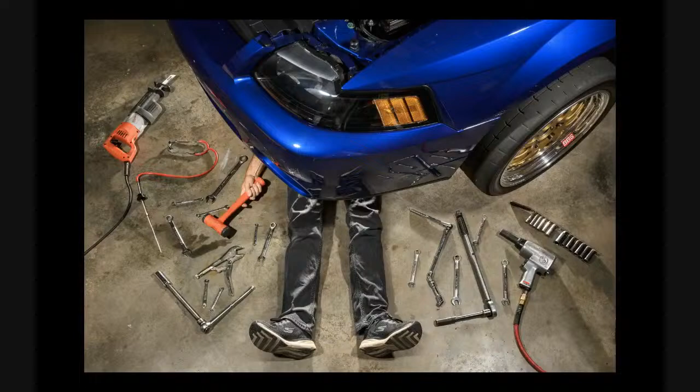So a little bit about me. I'm always wrenching on stuff. My Mustangs are in my garage in various states of undress all the time, so that's pretty typical.

Look, there's a theme here: cars in pieces and out in the open. Here, I guess I'm taking the K member and stuff, and I was going to put it in a different car. You could see my high-tech engine support device there, a 4x4 with some chains, which does work quite well. That one donated suspension to this one, which is a car I got for free -- probably that was too much as well. But this is an '83 Mustang Coupe that I got.

It was a V6 automatic car that somebody gave to me and said, 'Here, you need a Fox.' So I thought, okay, well, I need another one, and I wanted to build one. What I ended up doing is building it into that -- at the time I had a full-time job, and I wasn't real crazy about the full-time job, but I thought, I really want to build cars. At the time, I wanted to build cars for a living, race prep cars, build cars and stuff. So I thought, I really want to do this.

So this became what was going to be my rolling business card for that endeavor. Carbon fiber front fenders had made, exhaust through the body, all kinds of fun stuff. But I wanted to have a gutted, road legal track car, and that's what I built it into. I did everything myself except for the paint and the body.

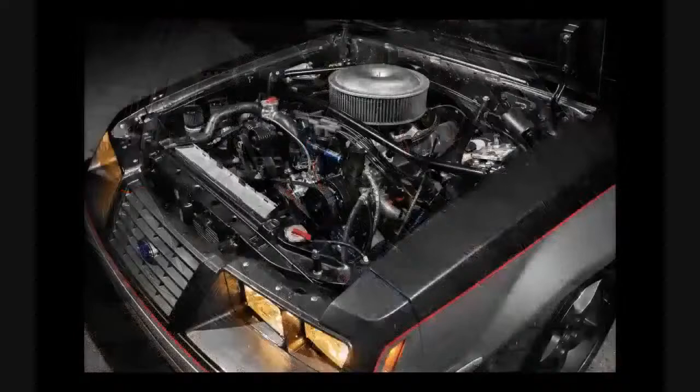At the time, by the time the car was finished, which took me several years to finish, I started to get into photography. And that kind of derailed that plan.

But here's another Fox that I've had recently, changing the heater core. There's another trend here, it's out in the driveway working on it.

When I was in college, I went more for an art degree. I wanted to be an industrial designer, just product design. But of course I had a passion for cars, I was constantly drawing cars and had ideas about them. So I quickly realized I was more interested in working on my car than actually sipping coffee and thinking about design.

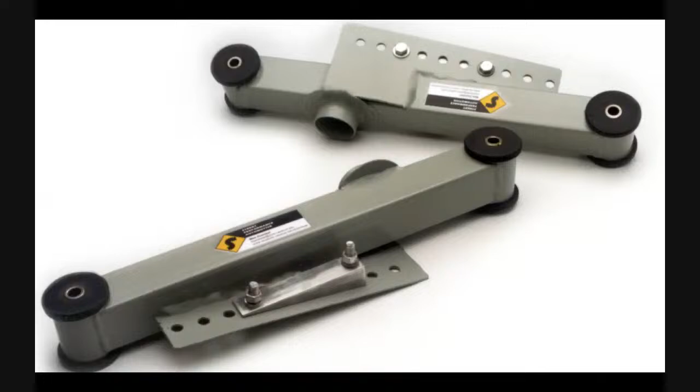This is something I designed as a senior project, some control arms that had an adjustable sway bar mount. A lot of it was just figuring it out, as far as where even to find materials. I think I even used tubing that was exhaust tubing for the bushing sleeves, which would not be advisable, but I didn't know at the time. I didn't know there was such a thing as metal supply places, I just took what I could find. But eventually I learned how to do it differently.

In 1999, I wanted to do an internship while I was going to school. Usually you try to do an internship during the summer, especially when you're closing in on graduation. So I went through a Muscle Mustangs magazine, flipped through the whole thing, and sent emails and letters to all the advertisers in the magazine, because that's where I wanted to do an internship. I didn't want to do an internship at the placement office at school, because those were boring places, making food processing stuff or injection molding and cheese making, since it's Wisconsin. I didn't want to do any of that. I wanted to work on cars. I wanted to learn how to do it.

HP Motorsport was one of the only places, like one of two, I think. I sent probably 30 or 40 emails and proposals to people, and they were one of the only ones that called me back and said, yeah, we'd like to have you come out. I thought, great, let's do it. I remember at the time it was $450 a week to pay me, and I thought that was a lot of money. Some internships aren't paid, so this sounded great.

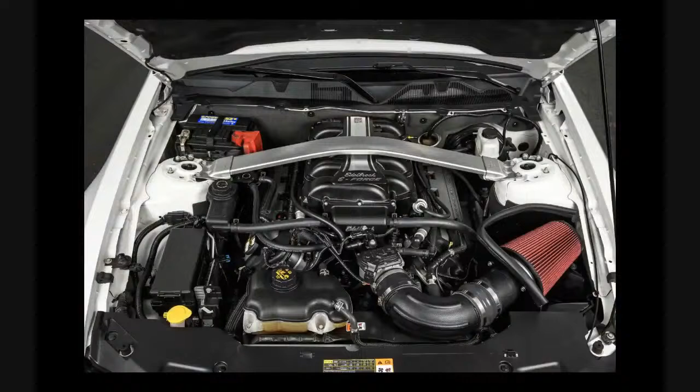They're easy to work on. All the hose connections are click hose connections - no hose clamps to monkey with. All the fasteners have little flags on the back, so if you're taking a nut or bolt off, you won't have to hold the other side with a wrench. It's really easy. They made it easy to assemble, and of course that makes it easy to disassemble.

This car ended up with an Edelbrock supercharger that we did for the book. Can't remember exactly how much power it made, but I think I have a dynograph here. We put a Tremec Magnum transmission in it, plus a bunch of other stuff. On the Mustang dyno, we started at 339 horsepower to the wheels and ended up with 537 at the wheels, with the stage 1, stage 2 Edelbrock kit. Really good power.

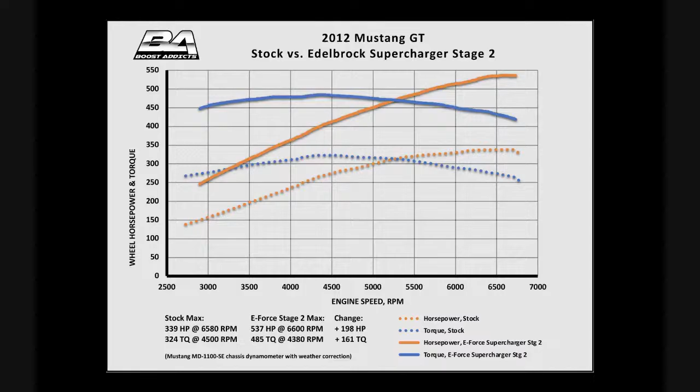These cars are responsive for modifications. It's not like the old push rod days where you'd pick up big gains by putting on an air filter or something. The gains are incremental, but significant. So over time, by adding a bunch of different things, you can make good power. Headers are helpful, and there's the Magnum transmission - really good.

Suspension stuff, Kenny Brown stuff. I put that in the rear grip kit, and I have to say, this is not a plug, this is serious. It fit perfectly. I was extremely impressed with how well it fit. Usually you're thinking holes don't line up. Working on Fox bodies and SN95s, stuff's not really going to line up anyway, and usually you kind of have to wiggle a bolt to get it in. But this stuff just bolted in like it was factory stuff. All the bolt holes lined up. It was super nice.

Another thing I learned that was really interesting is spherical rod ends. You think they're going to be a little noisy, not rattly, but transmit a little bit of noise into the cabin. I could not tell the difference between the rubber bushings and this from an NVH standpoint.

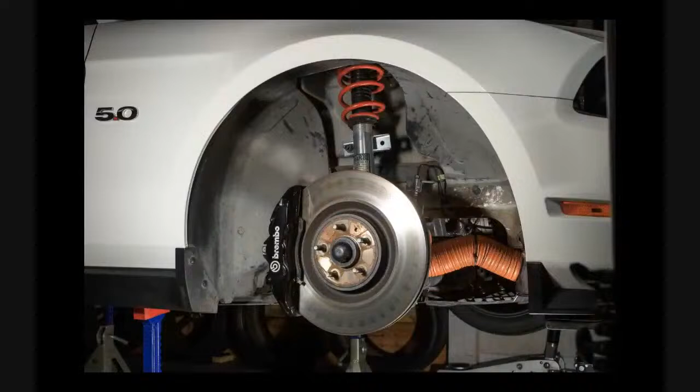So one thing to think about: it's easy to make a car fast, it's hard to make a car better. This suspension stuff, sure, it makes it faster, but it makes the car better, and you're not going to have NVH penalties or any of that stuff. It was phenomenal, I was really impressed with it.

Braking wise, I put GT500 brakes on it. These brakes are also really incredible. Had Kenny Brown brake ducts on there as well, and also the Street and Performance coilovers actually came from H&R, and that was a really nice setup as well. Spring rates seemed really good for road driving, and it made the car obviously a lot more responsive. You can adjust the ride height as well, which is nice, and it bolted in just like stock.

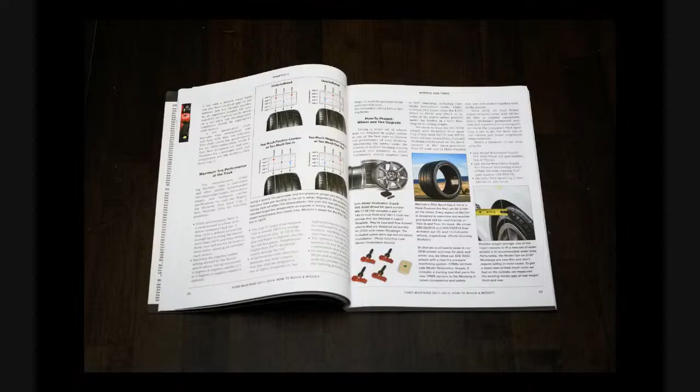In the book, we talk about a lot of things and I try to cover a lot of theory, not only what to do but why it works. Here we talk about basic stuff like tire temperatures and how alignment affects tire temperatures. Tires are obviously a huge performance factor, so having a good 200 treadwear tire is going to make the car feel and perform a whole lot different. We talk about suspension stuff too.

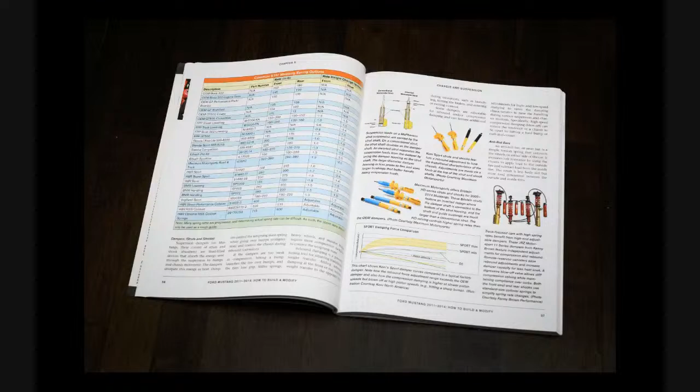So not only what, but why. I mean weight transfer, springs and shocks and all that stuff, and how the center of gravity relates to weight transfer, and how spring rates relate to weight transfer. I have some different spring options listed here, damper rates, and how dampers affect and even damper construction - monotubes versus twin tubes, what's the difference and why. Sway bars too, that's another big tuning tool.

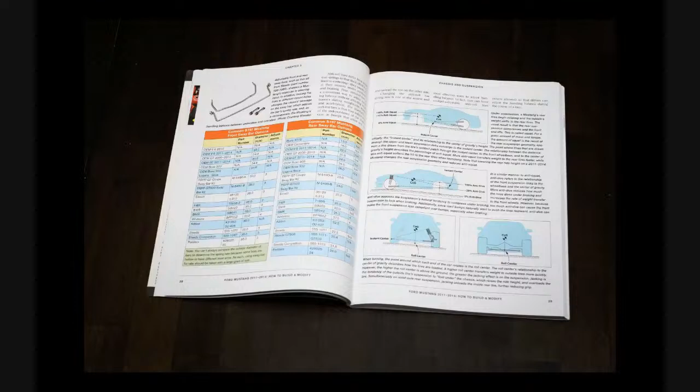And then suspension geometry - roll centers and how they affect ride and handling, and instant center for anti-dive and anti-squat geometry as well. All that stuff is actually, incidentally, adjusted and tweaked with Kenny's geometry, so it's all related. That's where we kind of talk about that here.

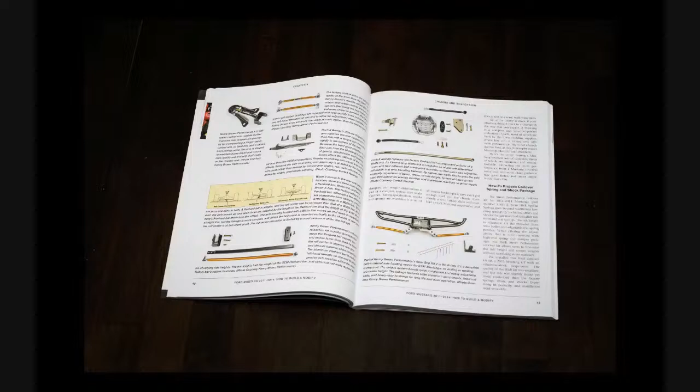This one even has some information about the new K-Link, which is a really phenomenal suspension design, revolutionary as far as adapting that type of linkage to an S197 Mustang, and it's a complete bolt-in, which is extremely impressive. But we also cover other stuff - Watts Link or Panhard bar as well, what's the difference between them, and why one may be desirable for what you're doing versus others, and the drawbacks and advantages of each design.

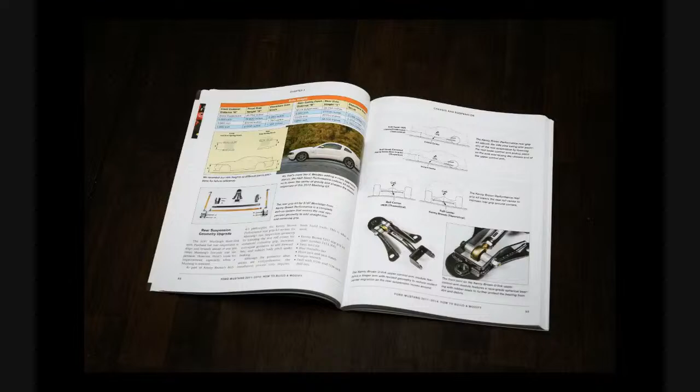More suspension stuff, especially with the rear grip kit, and then also a big thing we did was the Magnum transmission. The MT82 transmission in the S197 Mustangs has a bad rap, mostly because of the shifter design, not necessarily because the transmission's weak - it's not the strongest thing around, but it's mostly just the shifter design, where it's attached partly to the transmission and partly to the body. When the engine's under load, the engine moves around because it's on rubber mounts, which is a good thing, but it moves around. So when it moves around, but the shifter is partly attached to the body that's not moving, you get missed shifts and things like that. One way to fix all that in one fell swoop is with a Magnum transmission.

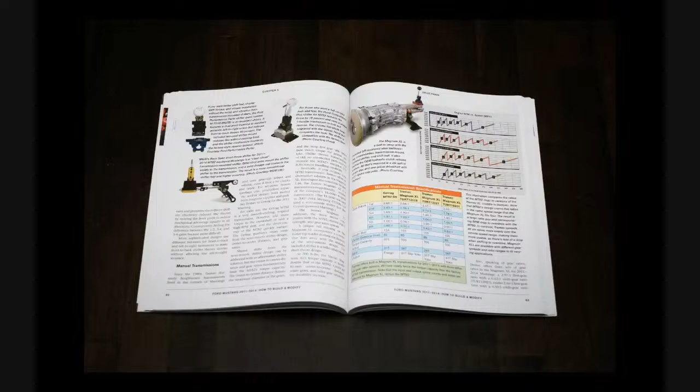Getting into the weeds there, I guess.

We also talked about the details of making a Magnum fit in an S197, which a lot of people think is just a bolt-in, but it's kind of not, as far as the speed sensor and the reverse lockout. You can handle that with a module you can get from Modern Driveline, I think Bowler makes one as well, and I show how to actually hook it up. There's also some tuning things you need to do, because to get cruise control to work properly you have to tell the PCM what the gear ratios are, and they're going to be different than the MT82. So we talk about that as well.

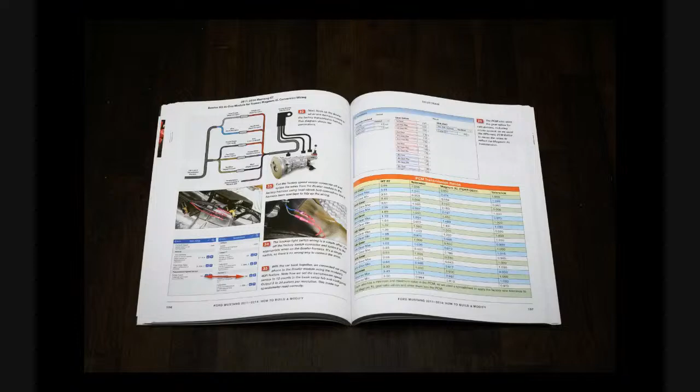Obviously a lot of how-to stuff, how to put in headers, and I even talk about what extensions and tools you need to reach some of the tricky bolts, especially the starter. I love Ford, but the way they mount the starter to the bell housing is frustrating in every single Mustang - Foxes, SN95s, S197s with Coyotes. I don't know why they mount the starter that way with bolts that are hard to reach. They should watch what GM and Chrysler does. I'm sure there's a reason, but I don't know what it is, and it's frustrating.

Anyway, tuning-wise too, we talk about that in the book. We use HP Tuners software, which I think you had Tony the Tuner on Cars and Coffee at least once to talk about. HP Tuner software is really nice, pretty intuitive. You have to kind of know some things, but we cover that in the book, and there's some specific things you can do that are pretty straightforward, just if you're patient and use a little bit of logic.

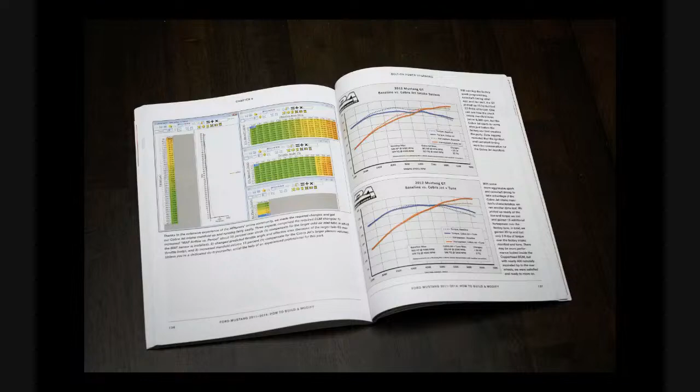I cover things like a really common one, putting on mass airflow sensor tuning. If you put on a larger tube but keep the same sensor, the mass airflow sensor is going to need to be retuned if it's beyond a certain diameter window. You can tune your mass airflow sensor using the HP Tuner software and the procedure I outline in the book.

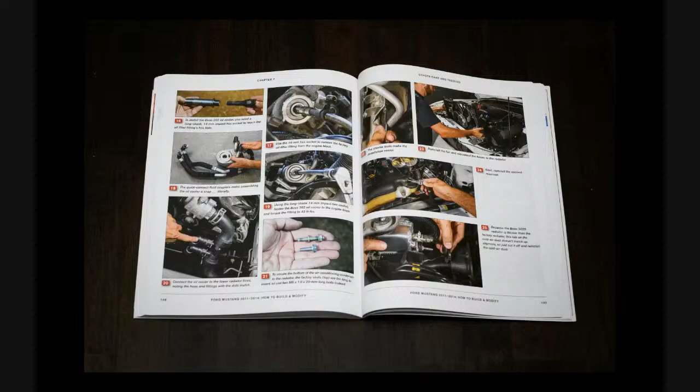Cooling - we did a big cooling upgrade for this Mustang. Later track pack cars had oil coolers, but this one did not. I guess track pack didn't exist in 2012. So we upgrade the cooling on it.

Supercharger - we install the supercharger and show step-by-step how to do all that. Here's some more tuning stuff with HP Tuner software.

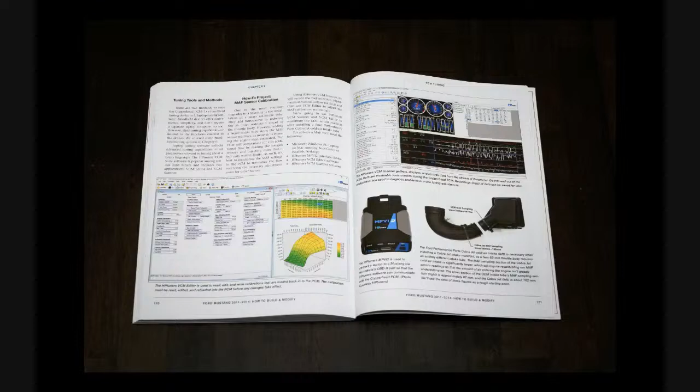We put on a Cobra Jet intake - a naturally aspirated combination of Cobra Jet intake and twin 65 millimeter, or is it 62 millimeter, throttle bodies, I can't remember offhand. But that was actually a really good combination, more than 400 wheel horsepower depending on the dyno you're on. So that's a really good combination, and we talk about all that and how to tune it, what's required.

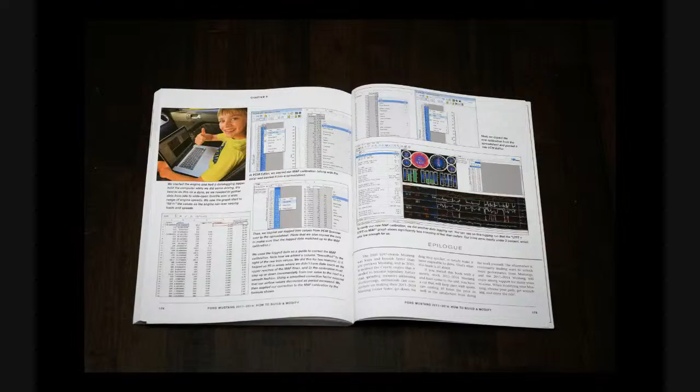Obviously it helps if you have someone to do a little bit of road drivability tuning, let's just say. It helps to have somebody to hold the computer like a kid - just make sure they wear their seatbelt.

So that's pretty much the book. I did all the stuff for the book myself, mostly solo, except for lifting the supercharger - I had my neighbor come over and help me put the supercharger on the motor, but all of it I did by myself in my driveway or garage on jack stands. You can do all of that with these cars. I'm super impressed with the S197 Mustang, easy to work on. With just a little bit of tools and patience, and if you pay attention, you can do all this work yourself. Kenny Brown suspension stuff goes on pretty easily in an afternoon.

Even the front, changing the front cross member and K-member stuff, because there's no power steering hydraulic lines to work with, it's actually a pleasure. And with the cars, modern corrosion protection means you don't necessarily have to worry about rusty, crusty spindles or fasteners and all that kind of stuff.

So I wanted to touch on a few photography things real quick before we open up to questions.

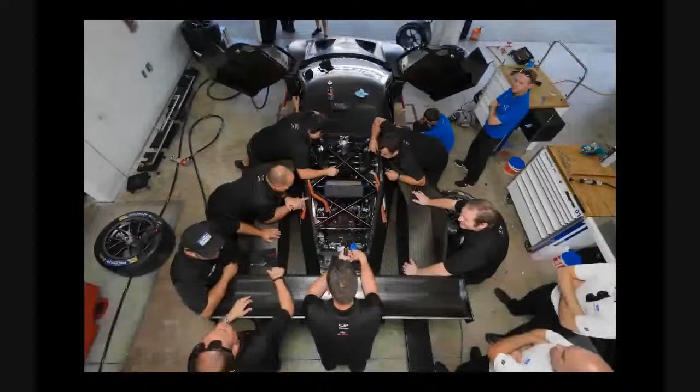Obviously everybody loves Ford GT stuff. This is just guys working on the Ford GT, which is cool. We did testing at several different places and they were just trying to figure out the car at the time. This is Homestead Speedway.

Working on cars like this is kind of cool. I think the Ford GT will be a highlight of my photography career, being able to do this for Ford. It was a privilege and a pleasure to work with all these people. Everyone was pulling in the same direction. Ganassi does an excellent job of hiring good people and letting them do their jobs, and Ford's marketing people had that same philosophy with Bob Chapman and I. It was basically show up and do your thing, which I greatly appreciate.

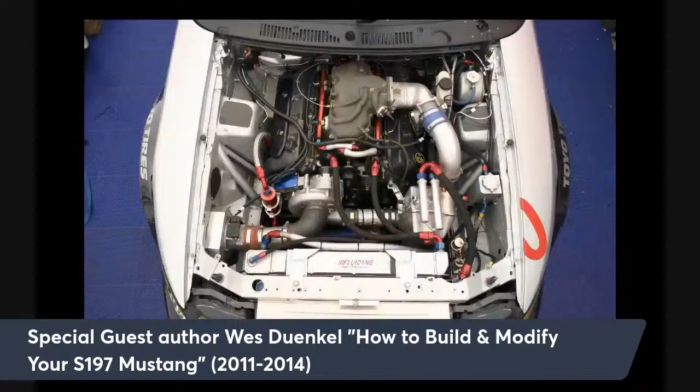That's with the Vortech. One thing I learned that's really interesting in general on supercharger belts: we had a problem on this car where the belt was slipping all the time. No matter how tight we made it, it would slip. What would happen is it was a fixed tensioner. You'll notice on every car with a serpentine belt, the tensioners are spring loaded, and there's a reason for that. Even the Vortech still does fixed tensioners on a lot of things, and for high boost, that's just not going to work.

The point is we had the belt super tight. When it was super tight, it would heat up. When it would heat, it would slip. And when it would slip, it would heat up more. When it would heat up, it would expand and slip even more. So it just was a vicious cycle.

Once we figured out a spring-loaded tensioner situation, the belt was so loose you could just grab it with your hand and move it around, but the tensioner would spring back and it would never slip. It made boost all the time because the spring-loaded tensioner kept the right tension on the belt, so it wouldn't slip and it wouldn't overheat, and it wasn't so tight that it overheated right off the bat. So always, always, always, if you can, make sure your supercharger system has a spring-loaded tensioner somewhere in the blower belt system if you're running a lot of boost.

The street stuff that Vortech does gets by with just a street tensioner, no problem. But on a racing application where boost is important, especially road racing with heat soak and everything else, when the engine shifts, the belt is going to slip because the engine moves a lot faster than the belt, or the supercharger has a lot of inertia, so the belt slips when it shifts. So you don't want so much tension in the belt that it's really overheating. That was an interesting thing we learned.